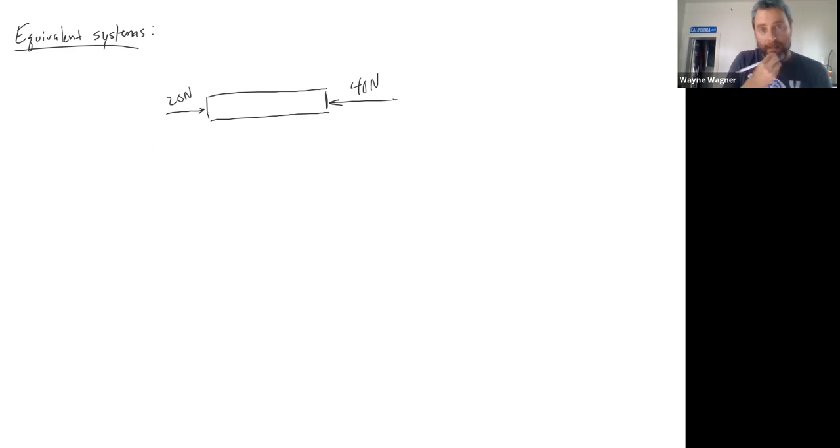Okay. All right. So equivalent systems. So basically what we're going to do is take one system, and I don't even have a good example of one, but let's just imagine I have a system that looks like this. I'll give you a really rough example here. Suppose I've got a bar, and I've got 40 newtons on this side, and I've got 20 newtons on this side. What I'm saying is, I want to replace it with something that's easier for me to think about, which is the exact same bar, but now it's only got a 20 newton right here. And hopefully you can see that these are equivalent.

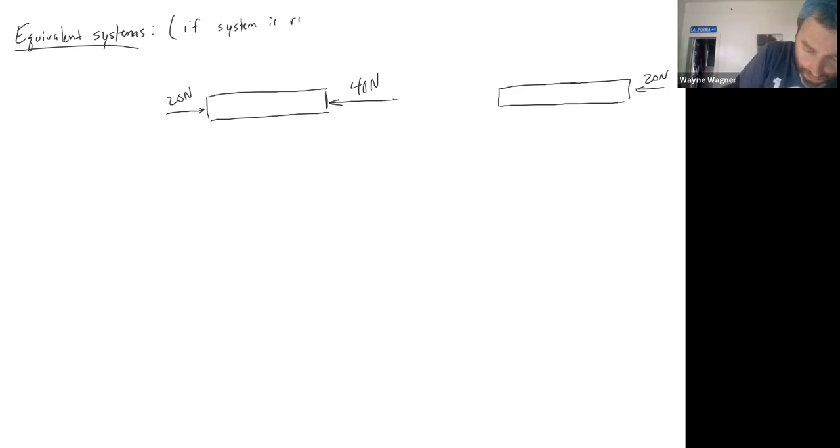Okay, they're not entirely equivalent. They're only equivalent if the system is rigid. So hopefully when you look at these two, you can see that in both of these cases, the net force is 20 to the left. But the only difference between these two is that this one's getting squeezed, right? And because it's getting squeezed, if it's not rigid, then clearly there's a difference between this one and this one, because this one will actually shrink and be a little bit smaller because it'll be compressed under that squeezing force.

Okay, so that's the way that these two are not equal, right? But in general, if rigid, then they are exactly the same. Okay, so what we're going to basically try to do in these cases is we're going to try to create a new system that is equivalent.

And the goal of this, and I've thought about this a lot because I've never really thought about equivalent systems moving through my engineering education or whatever, like I don't really think about equivalences. I'd forgotten that this was a part of this course. And what I realized is that we create equivalent systems all the time. It's not necessarily the whole system.

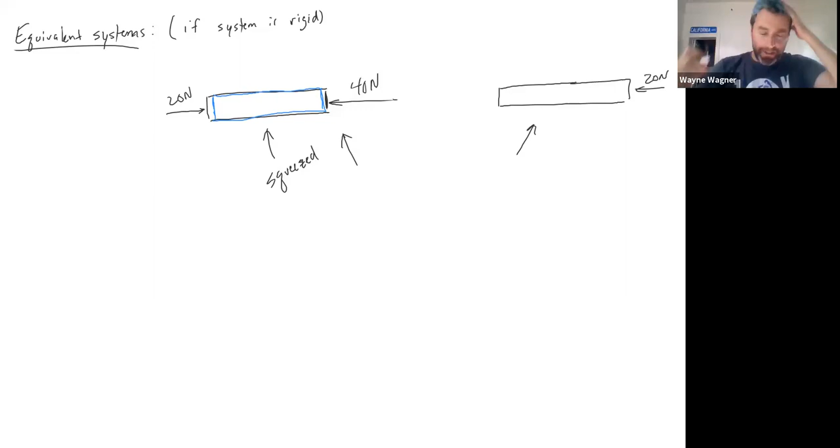Usually there's parts of the system where we're like, you know what, this is complicated over there. I'm going to simplify it by doing these things, and these things are going to make my life a little bit easier. And so you just kind of start using this all the time in little small ways. So what we're going to do is basically match between the systems.

You're going to match the sum of the forces and the sum of the moments between the original and the equivalent. Okay. And there's two things that they will ask you to do here. I say they because these are the book problems. And it's not just this book, it's like all of the books. So there's basically two possibilities.

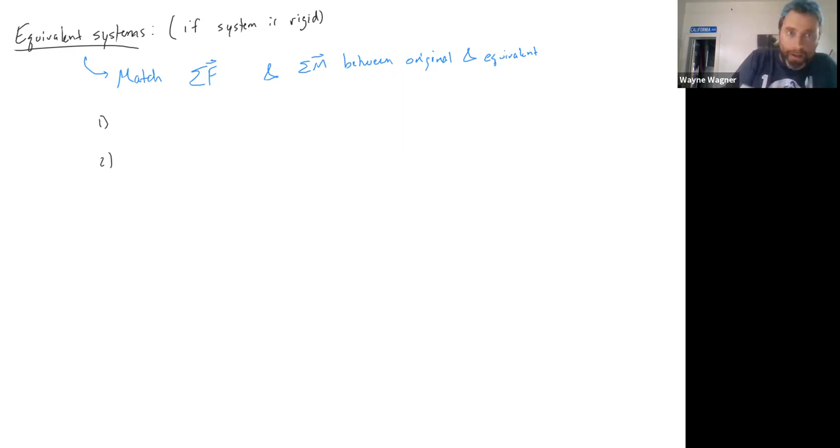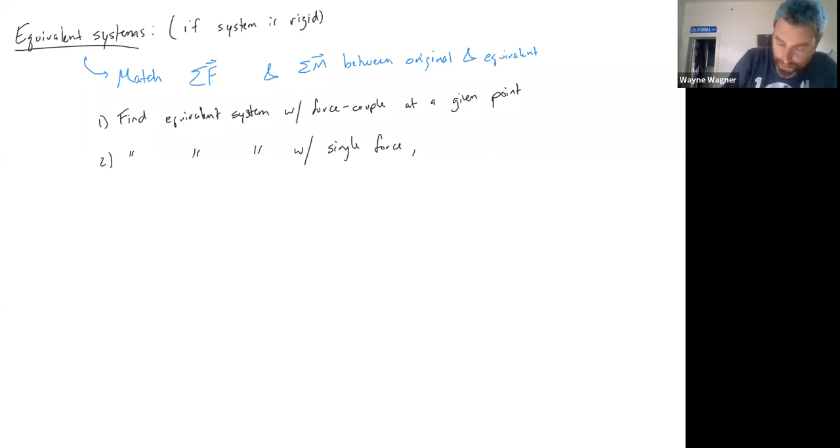One, you will be able to find an equivalent system with a single force couple at a given point. And then really it's just an extra step. You'll have to find an equivalent system with a single force, and then you need to find the location. And that's a little bit harder.

And basically, if you're asked this second one, usually what you're going to do is the first one, and then you're going to go from there to the second one. And I'll demonstrate that on some examples.

All right. So there's basically, I don't want to say rules, but I'm going to do this through examples. This thing's so annoying. I'm going to erase all of this. So I'm going to do this through examples and not through a lot of wordiness and talking. But basically, it works like this.

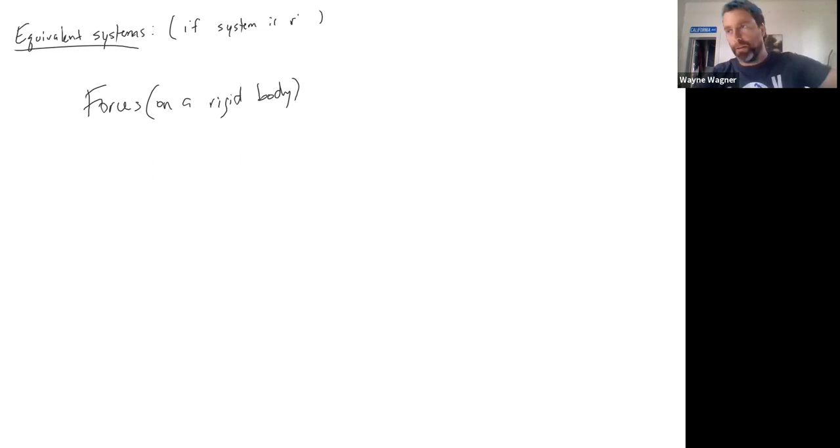What I'm going to say here real quick is this: forces on a rigid body. I'm trying to remind myself to say on a rigid body. This course assumes rigidity of the bodies, so you could put that at the beginning of the whole course. But I just want to make sure that years from now, when you're trying to remember how to do something, you remember that everything here applies on a rigid body.

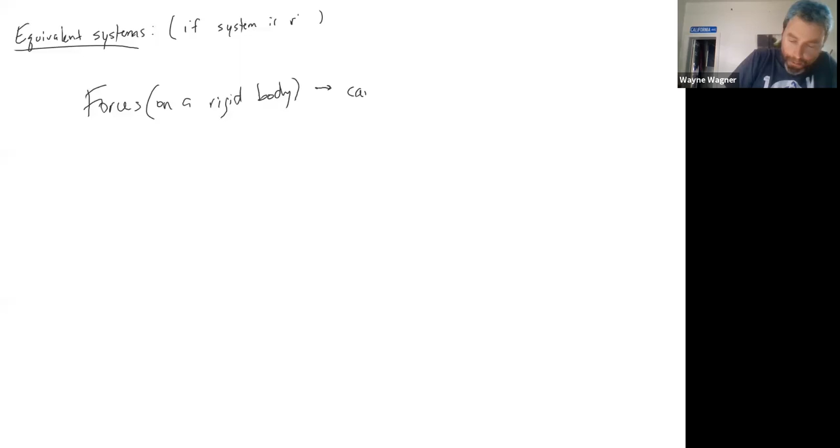Forces on a rigid body can always move along their line of action with no change to the system. That's key. The second thing here is that you can move them off the line of action, but that will affect the moment. I guess I'll just say that will affect rotation. And so you'll have to account for that.

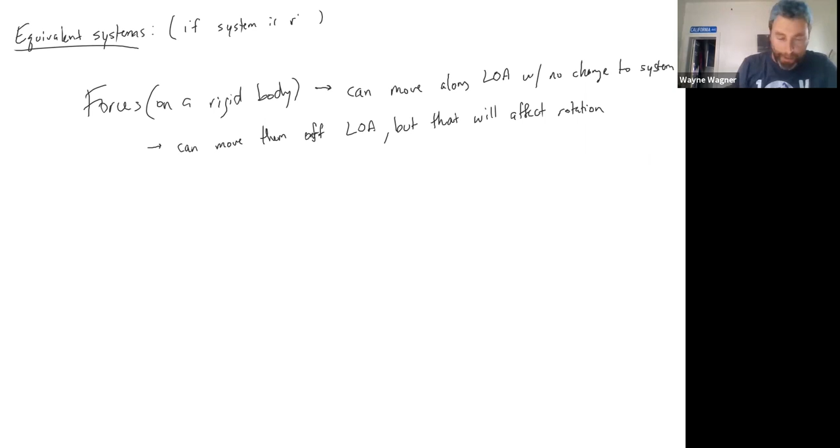So just to give a real quick example before I really get into this, let's imagine we had a beam, right? And I've got a force up and a force down, and let's say they're equal and opposite. Let's say this is 500 kips and this is 500 kips, and we've got a distance here of, I don't know, 20 feet. I'm just making this all up on the spot.

It should be noted that I can move that 500 on the top to the 500 on the bottom, and this is an equivalent system, right? I moved it along its line of action. So there was a dotted line here; that was the line of action of the force. And hopefully you've seen me do this enough that you internalize that you can do that.

And so that's an equivalent system without changing anything else. The other thing I could do is I could say, well, the 500 up and the 500 down, they cancel each other out, right? So I could be like, oh, well, I'm going to draw an equivalent system right here, and those two are going to cancel each other out.

Okay, but hopefully what you can see is that if those two cancel each other out, this is not an equivalent system. This right here is not equivalent to this over here. And the reason for that is because this thing wants to spin. So forget the word cancel out. If I took this 500 kip force and just brought it over here, so I've got 500 up and 500 down in the same location, well, that's great, now they're both gone, but I've moved this force off its line of action. And by doing so, in this case, I removed a rotation, right?

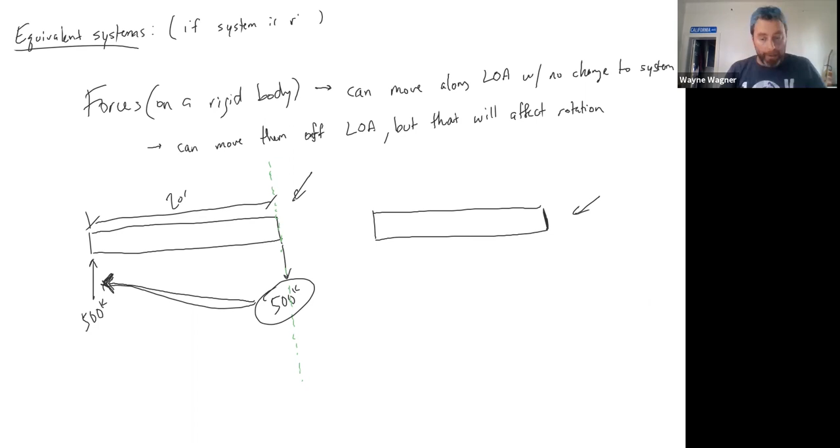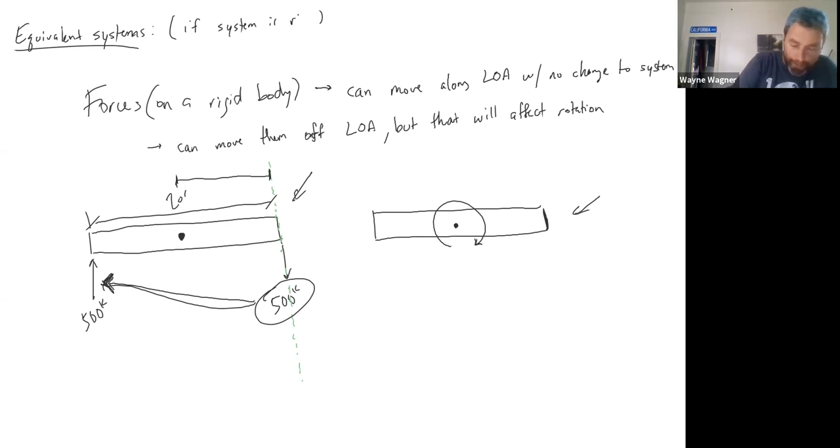So basically this thing wants to spin like this, and that is a moment. And these two forces, this 500 kip and that 500 kip, have a moment. If you remember correctly, I can go right here in the middle and try to get the moments for each of these forces. So I'm gonna put this moment right in here. For this force, the perpendicular distance is 10 feet, so this is gonna be 500 kips times 10 feet.

And that's spinning clockwise, so that's a negative. And then we'll do the same thing with this one, 500 times 10. And so all told, we get 10,000. So this thing becomes 10,000 foot kips, and that would be the equivalent. This system right here would be equivalent to this system right here.

This is all very informal. I'm about to do this a little bit more formally in a second, and hopefully it won't be so muddled. Any questions on that before I do something a little bit more formal with a real example? Nope. Okay.

All right, so let's do a real example. Clear all drawings. Okay, good. So here's a real example. Where did I get this one? Oh, this one came from your textbook. I wish I remembered what number it was. I might even have assigned this one for homework, but it looks like this. I'm going to take a split second and give you a drawing, using my trusty dusty straight edge.

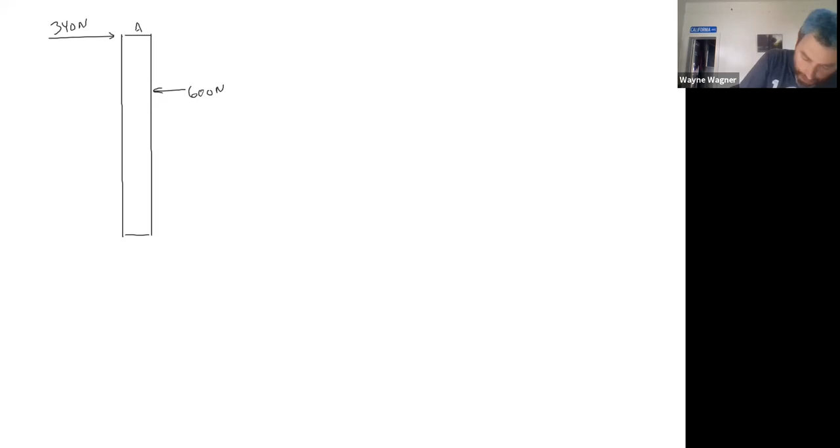Okay, so we've got a force right here. Of course, if you were doing this in your textbook, it's going to give you a different value for that force. I'm just going to give you 340 newtons. I'm just going to use the numbers on this particular problem, and I'm going to add one thing to it, 400 newtons. And then down here, this particular thing is bolted onto some kind of plate or something.

All right, we need some distances here. This is going to be 150 millimeters. This is also going to be 150 millimeters. Let's make it 200 millimeters. I like it when my distances change a little bit so that you can follow the numbers if you need to. Let's make this one also 150 millimeters. Let's make it 160, so we can follow it.

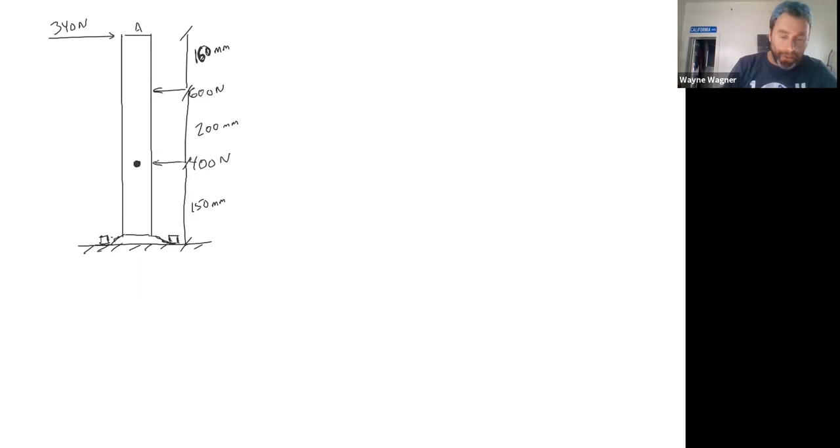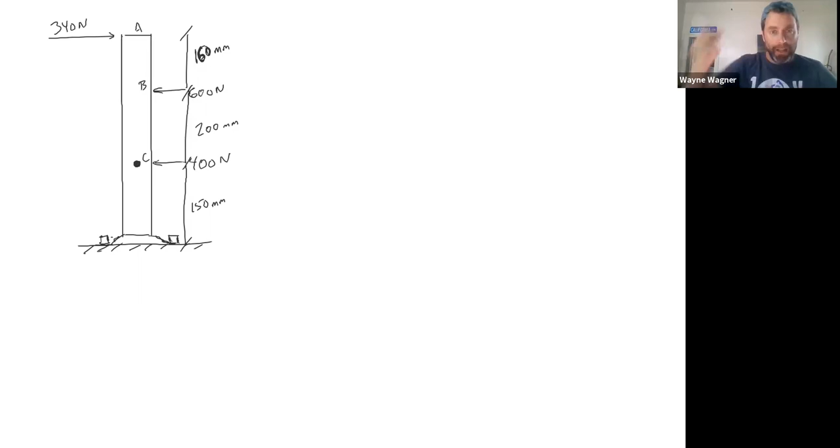The last thing to do here, because I feel like maybe it confuses people, we're going to apply a moment right here at that dot at C. So this is going to be B, this is going to be C. I'm going to apply a moment. You can imagine at C, if I just took a screwdriver, put it in at C and twisted it, right? So here we go. And let's just say that that's 6 newton meters.

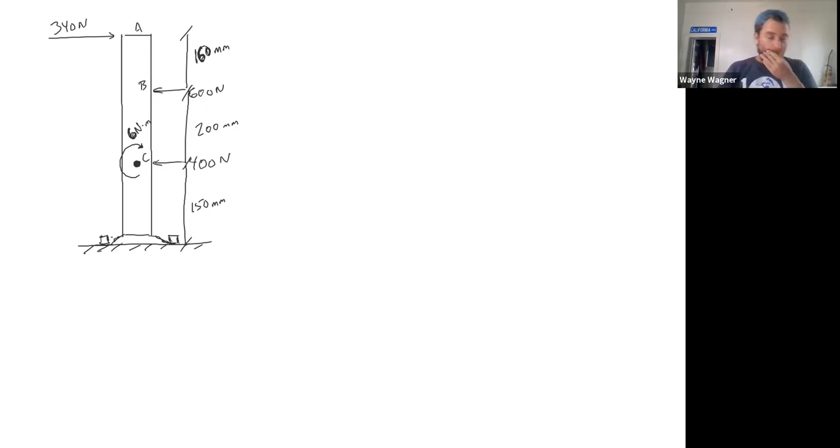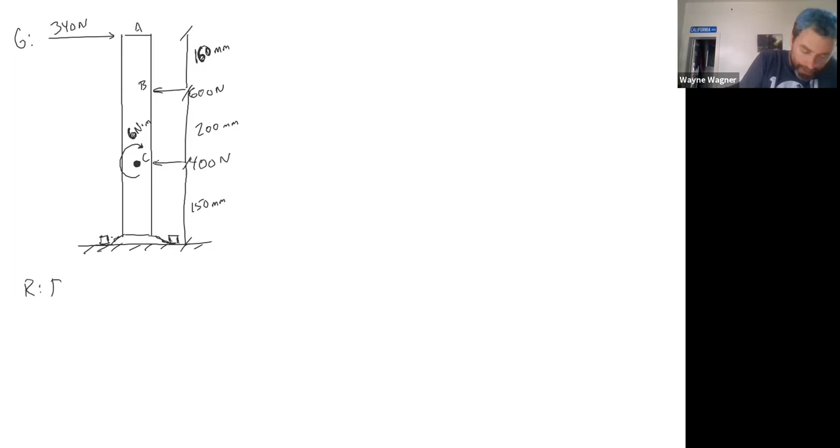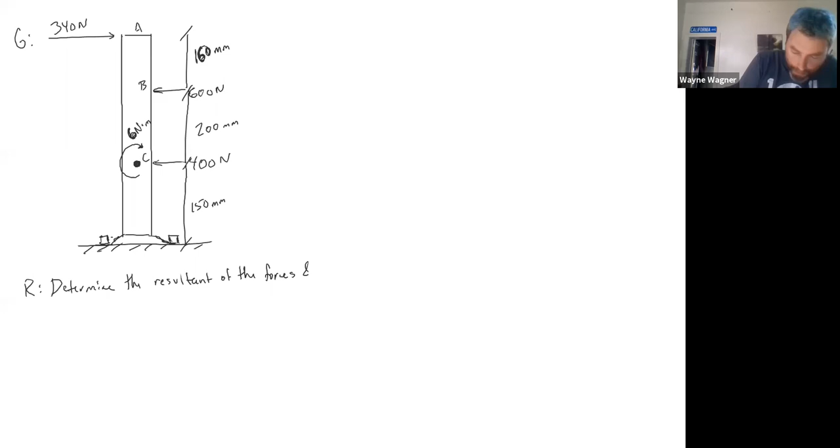So this is a little bit more complicated than the one the book gives you, because the next problem does not have an applied moment, so this is a good one to have it. What we're going to do here is create a few systems. So this is what's required: determine the resultant, this is the language the book uses, of the forces and moment, because there's a single moment there, and the distance from the ground to its line of action.

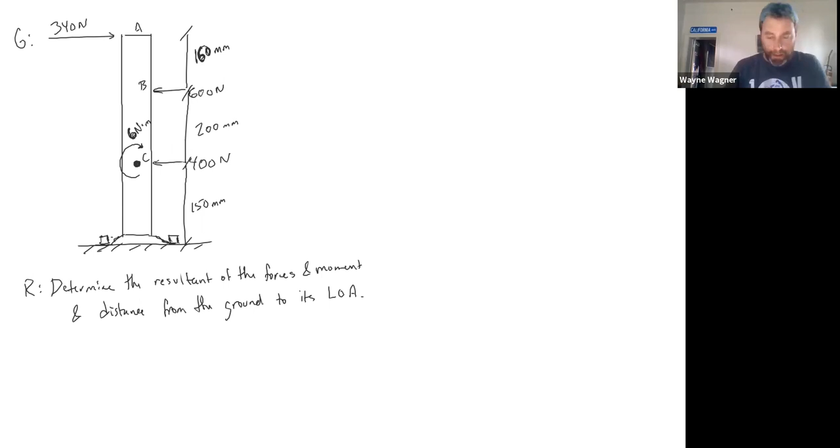Okay, so that's the language that they'll use, or at least that's the language they use on this particular problem. All right, so what this is telling me really is I'm going to replace all of those forces and the moment, and I'm going to have an equivalent system. Usually I don't like to belabor the drawing of the equivalent system, but it's going to look exactly the same.

But it's going to have a single force. I don't know if the force is going to be positive or negative, but it's going to have a single force. Let's just call it F. And it's going to be at a certain location, which we could call Y, or whatever it might be. Let's just call it lowercase b. So that's kind of what we're looking for.

It seems like I probably got the right force here. I'm a little bit worried about adding that moment in because that wasn't in the problem, but I guess we'll see what happens. So what we're going to do here is create an intermediate step. There's two things they're going to ask you for: one is an equivalent force couple at a given location, and then they can go from there and ask for a single force and for you to tell them the location.

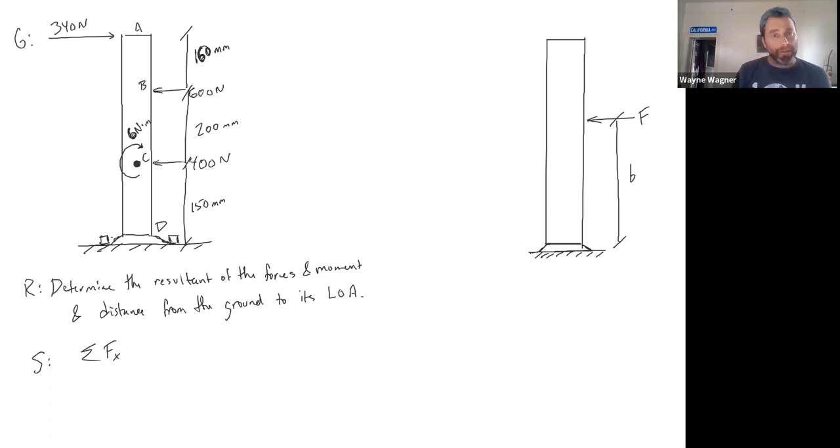So here's the solution. I want to look at this initial problem and look for the sum of the forces in the X. I'm not going to set that equal to 0. I'm just going to expand that because I want to know what the sum of these forces is, because that's the equivalent effect that I need to have on any other system. So I'm going to just add those forces up. It does not equal 0. It might end up being equal to 0, but it doesn't equal 0, so just be careful there.

The sum of the forces in the X. We're just looking for the net effect of all these forces. That's 340 newtons to the right, minus 600 newtons to the left, minus 400 newtons to the left. So the sum of the forces in the X equals 340 minus 600 minus 400. I could do that in my head, but anyway, negative 660 newtons.

Oh, by the way, I feel bad. I was a little rude to the two of you who asked about what was on the test. When this is over, if anybody is unclear, let's talk about that, so just hang out. I won't be rude. I apologize. I get testy sometimes. I try not to, so my apologies.

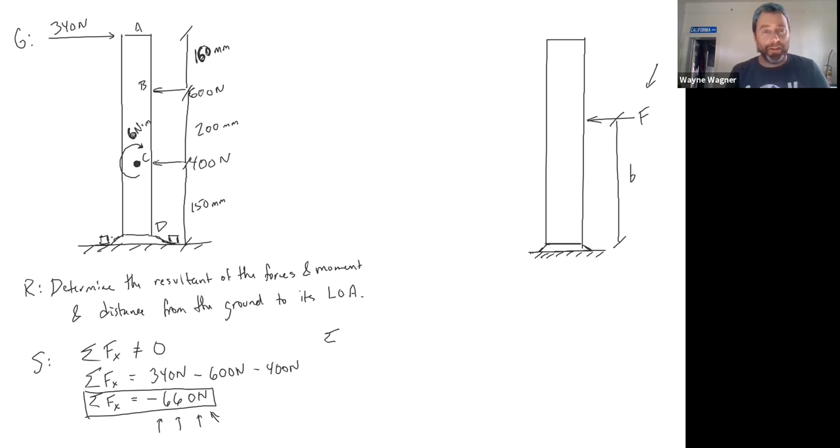So then we'll do sum of forces in Y. There are no forces in Y, so we're not going to worry about that. I chose this problem specifically because I didn't want to deal with forces in Y. The next thing I want to do is the sum of the moments, because whatever equivalent system I have, the sum of the forces in the X direction is going to be negative 660 newtons. I already know the force is going to be 660 newtons to the left, but that's kind of jumping the gun. So I want to do the sum of the moments.

And I need to pick a point that I want to do the moments around. And one of the things we haven't really talked about is these moments right here. I guess I should have put this in the official notes. This moment right here, an applied moment, can be moved anywhere with no questions asked. You can apply that 6 newton-meters anywhere you want on this thing. It has the same effect.

Now I know that that's going to be a little counterintuitive. I have a little video where a guy demonstrates that, and I'd like to show you guys that today. We'll do that in a second, but we can just move that wherever we want. Considering that my ultimate question asks for a distance from the ground, from this point down here, I'm going to do the sum of the moments around this point D.

And again, I almost wrote equals 0; it does not equal 0. It equals whatever it equals. Because this thing is static, we know that ultimately it will equal 0, but right now we're not accounting for the forces coming from that plate at the bottom at D, from those bolts and from being attached to the bottom. We will get there, we're just not there yet, and that's what we call the reaction forces.

But I've just chosen point D. You don't have to choose point D. You can choose whatever point you want. I like D because my distances are pretty well defined. And I know b over there, this thing we're looking for, is definitely going to be positive relative to point D. So I just chose it. You could choose whatever you want.

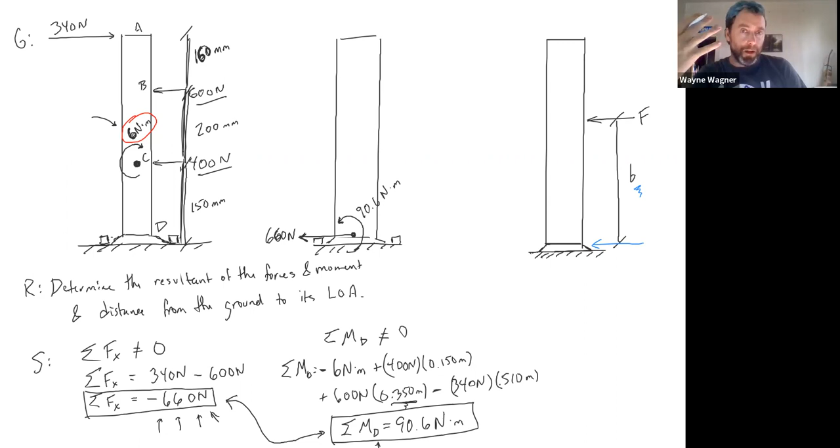Now note we could have done this at a different point, and this would have been an identical calculation. Of course, I got rid of that minus another 400. Forgot about that, or I erased it. But this one would have been different because these distances would have all been different, because instead of measuring it to D, we would have measured it to wherever you wanted the equivalent system. Does that make sense?

Okay. So the next thing we want to do is change. So this is equivalent. Is that like three equal signs? Something like that. So now I want to do an equivalence over here. Let's suppose this F, instead of being F, was 660 newtons. Let's call this system 2, and we'll call this system 3.

You can see that if b is the correct number, what I'm doing is taking that 660 and moving it not along its line of action. I'm moving it up, from down here up somewhere. And so that has an effect on the moment. This 660 imparts a moment around D. So if b is correct, I'm going to get the same moment around D as I have right here. But it depends on where I put it.

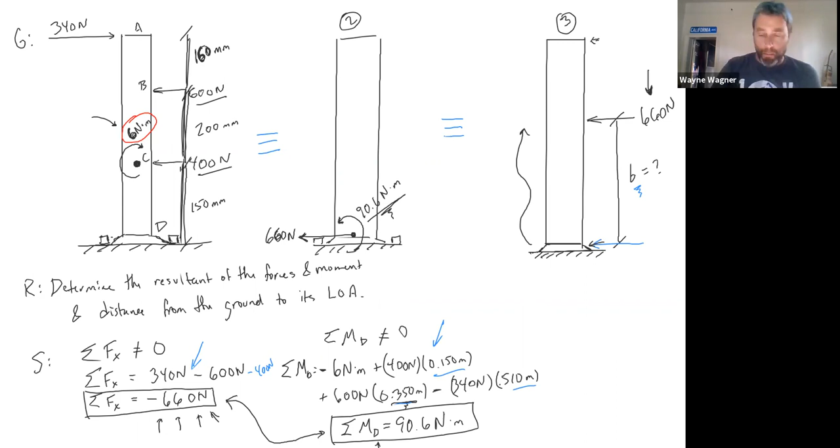If I put the 660 all the way up here at the top, then I'm going to get a massive moment, and maybe that moment is too large. If I put it down here at the bottom, then I'm not going to have a moment around D at all. So to get an equivalent system, I want to move it such that I get the same moment in these two spots.

So the way we do moments in 2D, if you remember, and usually we actually use torque for this equation, torque equals moment equals force times distance, right? And this distance, I like to put this little symbol to remind myself that it's a perpendicular distance. So I know that 90.6 newtons times meters is my moment.

And I always put my positive signs, even though mathematically we don't need to write that. But I usually do because it reminds me that I'm taking care of that sign. If I see that plus sign, maybe I'll go back and check it if I've got time on a test. But it reminds me I've already checked the sign there. And then the force is 660 newtons.

Okay. And that force is causing, it looks like it's causing a counterclockwise rotation. So the sign on this is correct, is fine. And then we'll go D perpendicular. Okay, so this distance perpendicular, in this case, that's B. That's what we're looking for. Sorry, we should change that to B. Okay, because it said, you know, the distance from the ground to its line of action.

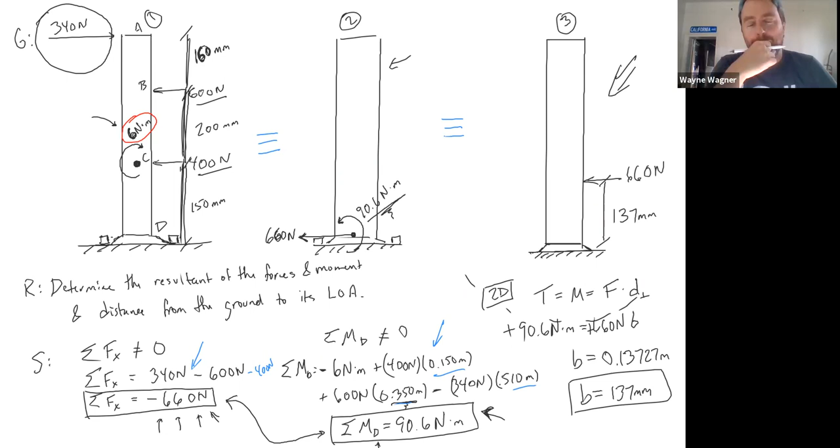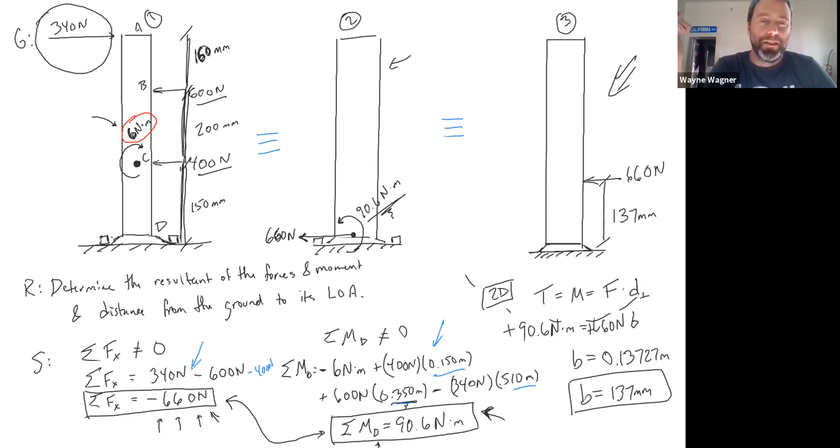We could have a resultant moment. I don't normally hear people talk about a resultant moment. The resultant is the sum of the forces. Whenever I hear moments, I think you usually call it the sum of the moments. But you could call it the resultant of the moments. Anytime you're adding vectors, you can call it a resultant. Yeah, so, but this is, so, yeah.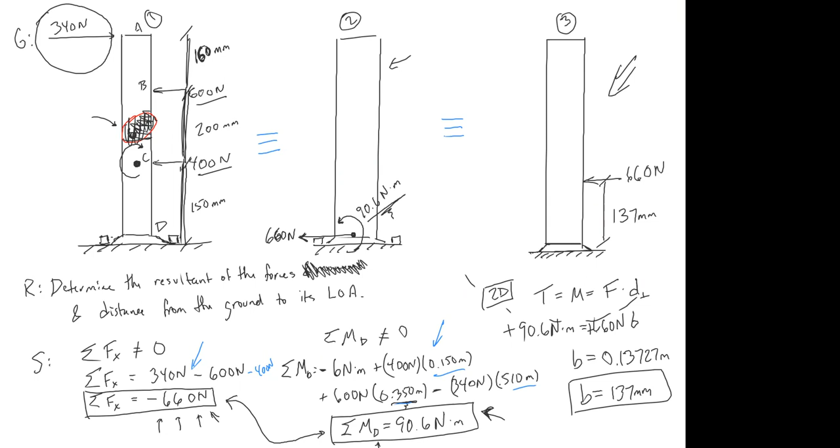Yeah, the problem is I added this moment. So this is the real way it was written: the resultant of the forces and the distance from the ground to its LOA, but it didn't have this moment right here. But I wanted to make sure that we had an example in class that had a moment, so I just added it in just now. Yeah, I was just seeing if it was like a combination of the force and the moment or just the force alone. I'm not 100% sure, to tell you the truth. Let me know if the language ever confuses you again, and we'll figure that out together. Yeah, sorry, that's not a very satisfactory answer. Resultant usually means forces.

Okay, so let's try another one. Any other questions? Good question. I apologize for my unsatisfactory answer. Any other questions? All right, let's see here. Clear all drawings. Okay, so this next one, I think I got this one off the internet somewhere. Well, I got all these off the internet somewhere. Here we go. So I didn't print these out for you, because they're 2D, and I figured I could draw the 2D ones.

Next semester, I hope to just give everybody a sheet of paper or whatever. I mean, like a handout at the beginning, like these are all the example problems I'll be doing. But probably next semester will be in person. We're all going to be required to be vaccinated, except for a few of you who have religious exemptions or medical exemptions. Okay, so there's some sort of, I don't know, post or whatever they call this thing.

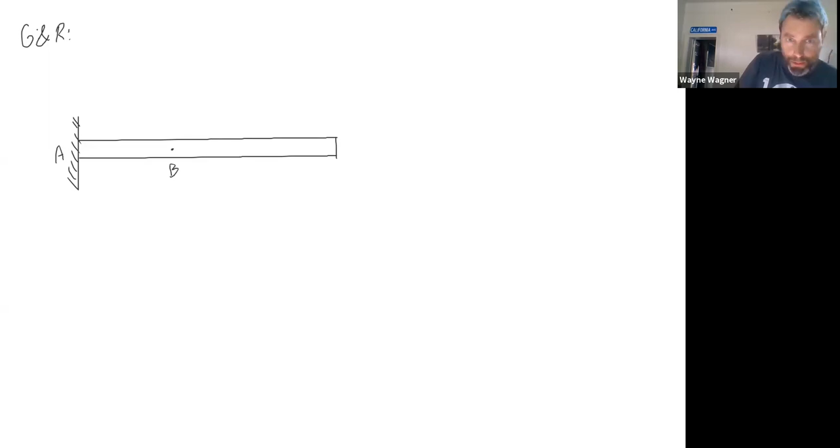Okay, given. I'm going to do given and required because I gave myself too much space here. This is going to be point A. We'll give these points A. This will be point B. So I'm going to do this in 2D. Basically, the last one was kind of like a 1D example because all the forces were in the X direction. So I'm just going to give you another one that's not like that.

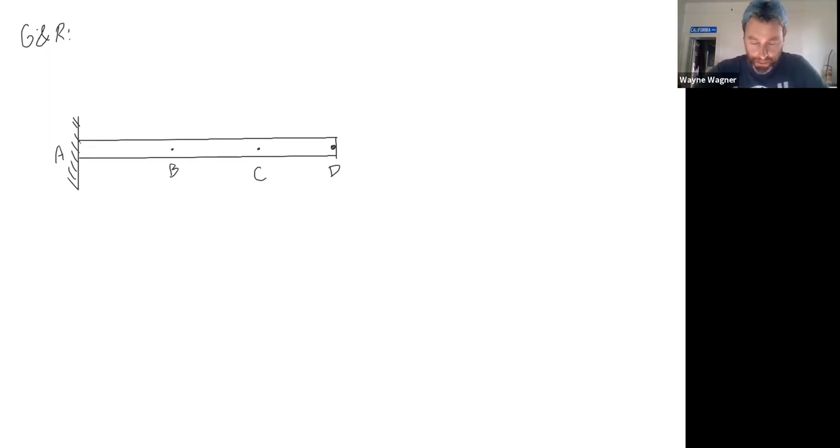And the last one we'll do will be in 3D. And I know where to find that one on the internet, so you guys can look at it if my drawing is bad. Don't think my drawings are that terrible, but it is hard to draw in 3D. So I will not be offended if you guys are like, your drawings are hard to follow. That's totally fine.

Okay, so then this is 100 pounds. Okay, and this is annoying. Or maybe it's not annoying to you. For me, I really like it when they give me a 3, 4, 5 triangle, but you can treat this like whatever. I like it when they do that. A lot of you will prefer the angle because you'll be like, well, I always just do the same thing with the angle. Okay, so it gives me distances here.

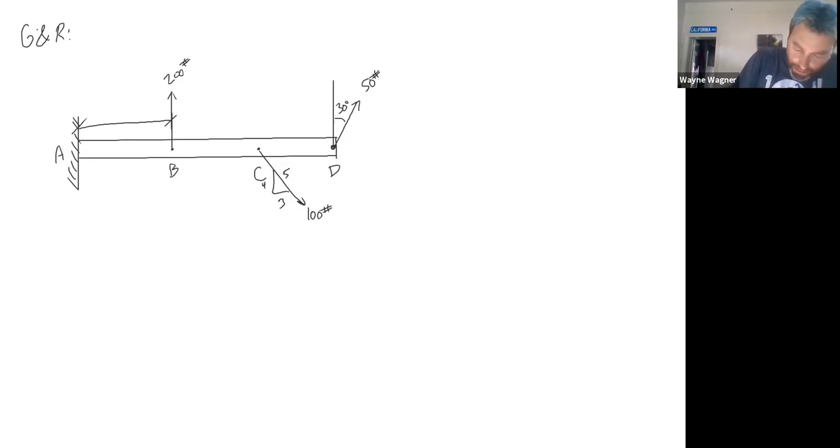Again, I'm going to change these distances. For the problem, if you were to look this problem up and find it on the internet, it gives 3 feet for each of these. I'm going to give slightly different numbers because, you know what, these are fine. We'll do 3 feet, 3 feet, and 3 feet because the distances are going to be 3, 6, and 9, right?

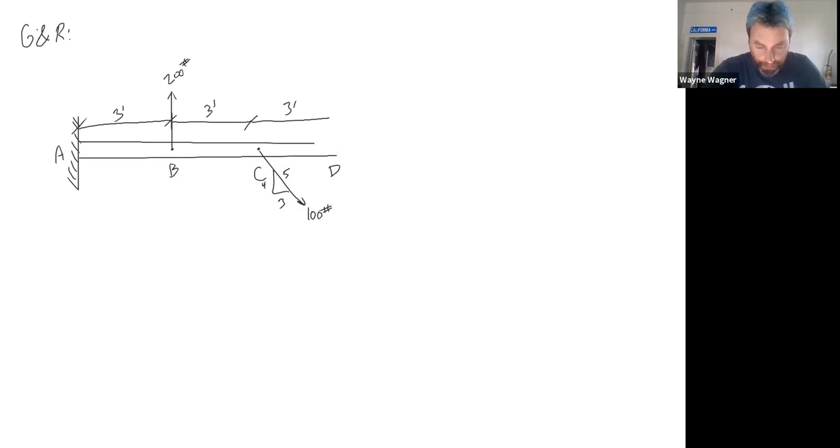Actually, you know what? This really isn't all that different. Let's change this. I'm going to change this problem a little bit. Should have thought of this. I thought I had a nice 2D example, but it turns out that that's really a 1D example. Okay, so then let's have this thing go in a little bend here. Okay, same force, same angle.

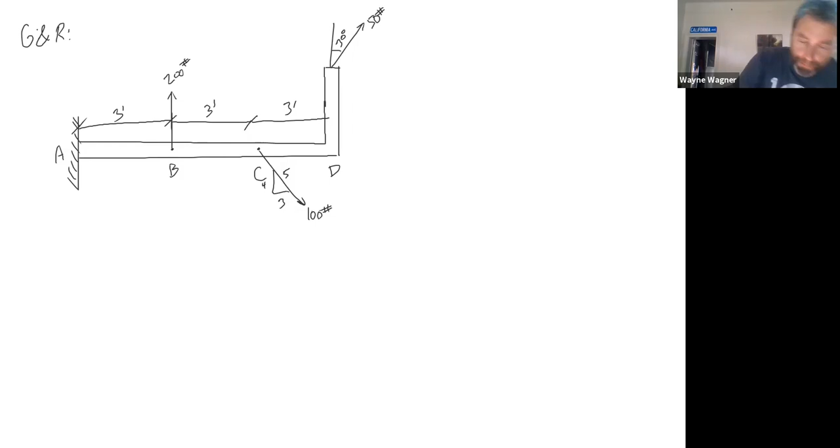Okay, 50 pounds. This is also practice with moments, right? Because you guys haven't done that, or maybe some of you have done that homework already. So then this is going to be 3 feet. We're just going to keep everything at, let's make that 4 feet, so you'll know when we've gone in another direction. Okay, find the equivalent result.

So here we go. Find equivalent resultant force and couple acting at A. So that's the first type. And then the equivalent single force.

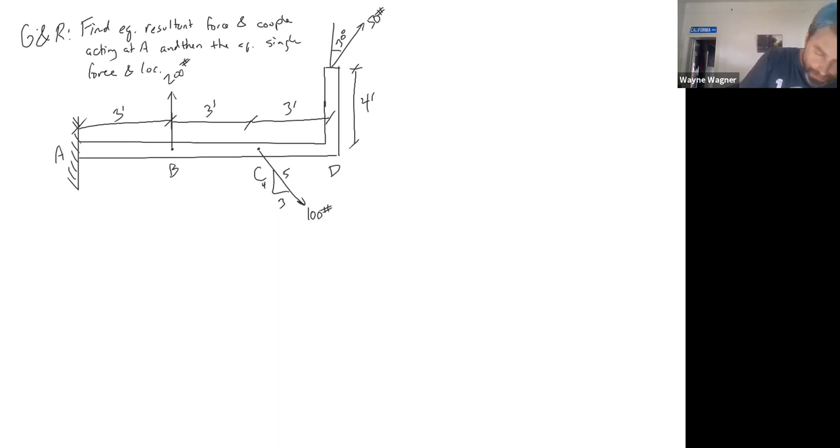Location measured from A. I really doomed myself here. What was this, 200 pounds, 200 pounds. Measured from A. Look, in this case, we're not going to say measured from A. I'm going to say on AD.

All right, so we're going to do exactly what we just did, but it's just going to be a little bit different, right? So now we've got 2D, so I've got to do some forces in the X, some forces in the Y, and then I've got to do moments. And this time we've got two questions. We want the force and couple acting at A, so they give us the location, and then we get the equivalent single force, and they tell us it's going to be along AD.

If they don't tell you it's going to be along AD, it can be annoying. I don't think they're ever going to do that, but they could. So the first thing I'm going to do, just because it's going to make my life a lot easier, is get the components of these forces. I don't think the green shows up very well, so I'm going to do blue. So this force is not in the XY. It's on an angle. So I want to get its components.

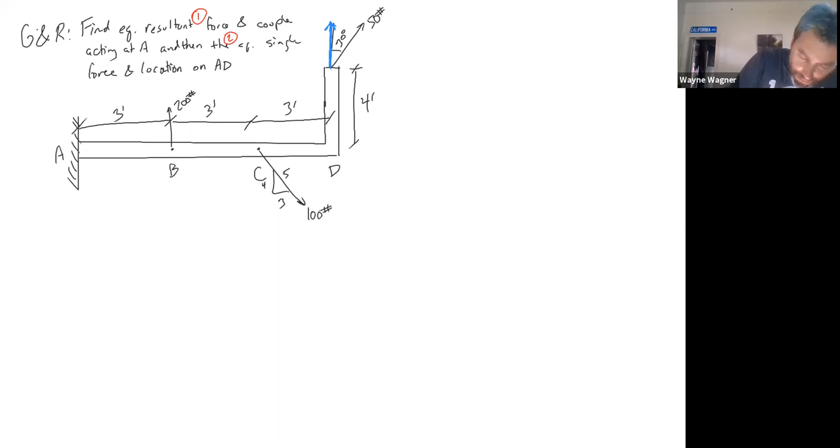I'm not going to do the trig here. If you want to stay after, we can talk about the trig and do that. But it's going to be 50 sine of 30. At this point, I'm hoping you guys are getting this. So 50 sine of 30 is this side. So that's going to be 25 pounds. And the other side is going to be 50 cosine 30.

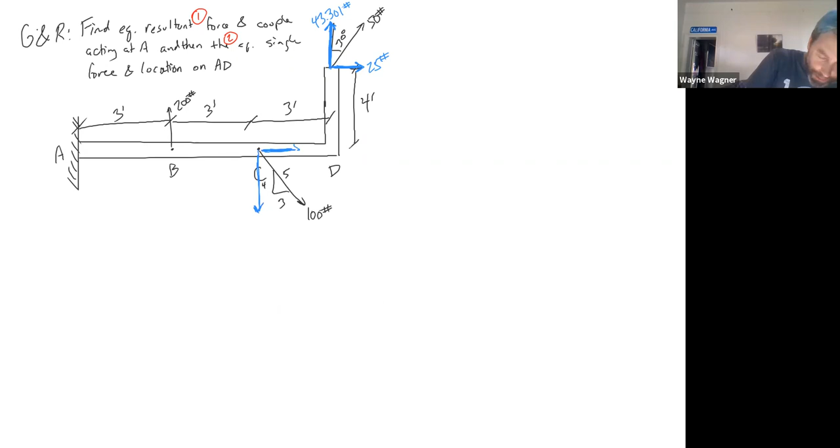That's 43.301. 43.301 pounds. Okay. Now for this one right here, we're going to do the same thing. And sometimes it's just easy to just knock this out early, right? You know you're going to need this, so just do it.

In this case, what I'm going to do is a similar triangle. So I'm going to note we've got 100 pounds along the diagonal. So if I divide by 5, that's 20. And then if I multiply times 4 in the vertical, I'm going to get 80 pounds here. So again, I'm going to take that 100, divide by 5 and get 20 and multiply times 3, and I'm going to get 60 pounds here.

Okay, a lot of you will prefer to go and get the angle and then do the trigonometric functions. I always prefer to use the 3, 4, 5 if I can. Notice this is its own triangle. So here's the 3, 4, 5. Notice this is a similar triangle. Now this is 100, 80, 60. Much easier to just do similar triangles than to do sines and cosines.

Okay, so anyway. All right, so now what we're going to do is an equivalent system. They gave us a point, so we're going to do this around A. So remember, for the forces, it doesn't matter. We're just going to add them up. The location doesn't matter for the forces. So sum of the forces in the X. Again, I want to write equals 0 because we're already getting used to that. That's not the case here.

So the sum of the forces equals, I'm just going to expand in the X direction. I've got this 60 pound to the right, so it's a positive 60. And then I've got 25 pounds to the right. Okay, so that's not too bad, 85 pounds.

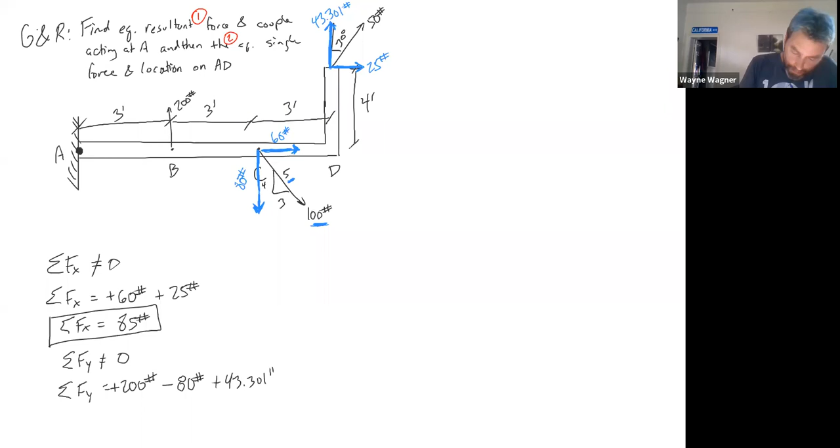We've got 200 up. That's positive. We've got 80 down. And we've got 43.301 up. So the sum of the forces in the Y equals whatever that is. So 200 minus 80 is 120, plus 43.301. I don't know why I'm getting out a calculator for this. So it should be 163.30 pounds. Keeping 5 sig figs all the way to the end. Questions on the forces before I move on?

Okay, so let's do the moments. As always, the moments, in this case, it's the Z direction. If this is X and this is Y, then Z is coming out the board at us, because remember, X is the fingers, Y is the palm, which means the thumb is the Z direction. So the Z is upwards. And my fingers are curling this way around that point, and that is going to be the positive. So a lot of times people will draw this to remind themselves of that. So this is the Z direction, and we're going to take it at A.

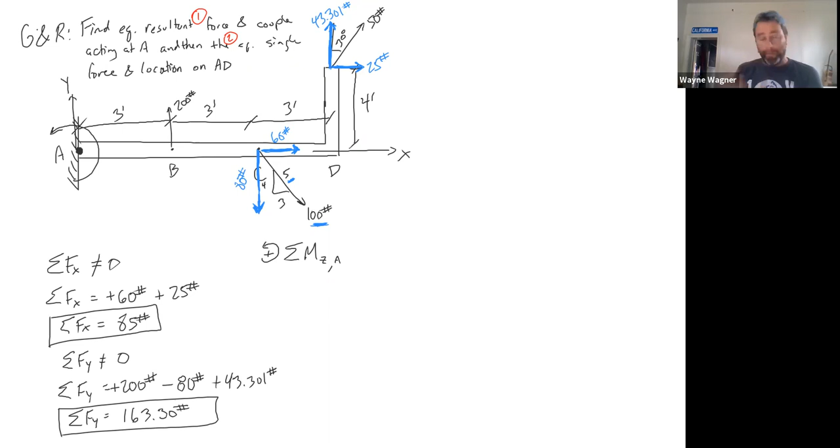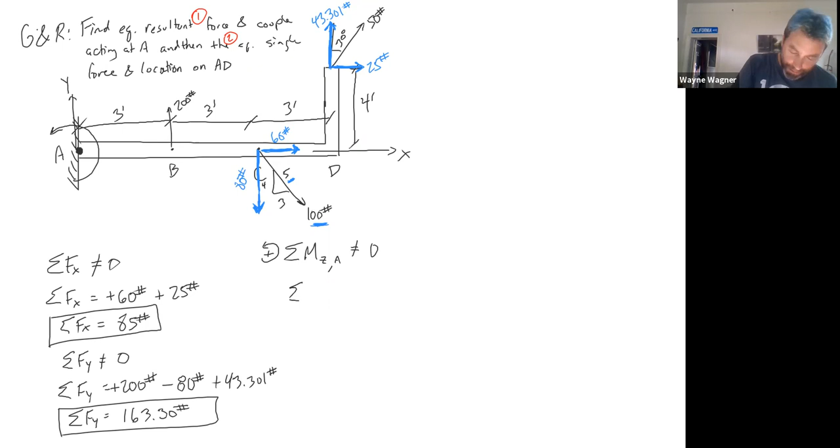Most people won't bother saying this is the Z direction. They're just going to say they're taking it at A. I like to remember that it's really going around an axis. Anyway, so again, it does not equal 0. It equals something else. A lot of people will get into the habit of doing that. It's not really a bad habit. I've never really been in that habit, so I'm going to forget. But it's not a bad habit to get into, to remind yourself, counterclockwise positive.

All right, so remember, we have to think about all of these forces, and I'm going to mark them in red as we deal with them. So here's the 200. We've got 200 pounds, and that looks like it's going to go counterclockwise, so that's a positive. And its moment arm: remember, the moment arm is perpendicular to the line of action, so that's going to be 3 feet.

Then let's do this 80. It's going in the opposite direction, but it's got a larger moment arm. So that's going to cause things to spin clockwise. Can you all see which way these things are spinning? Hopefully you can. Please speak up if you can't. So it's 80 pounds. Because I'm more than happy to show you. Relative to A, it's causing things to go this way, right? So if I were to draw a big circle, that's clockwise, so that'll be negative 80 pounds. And then the perpendicular distance there is 6 feet.

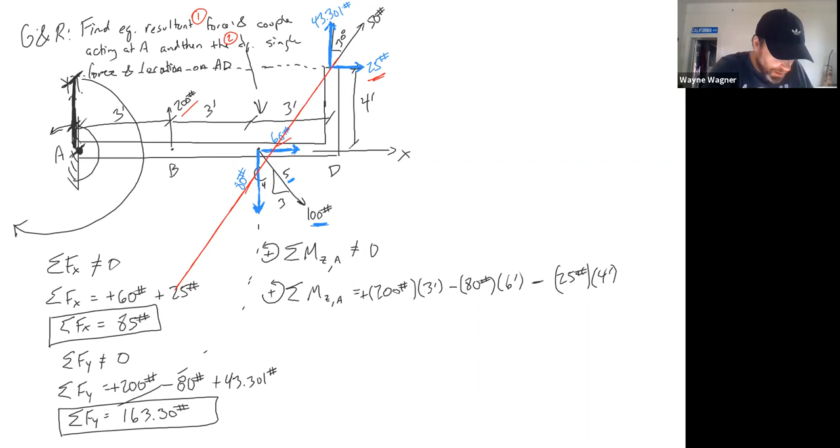The problem with doing the 50 is if I did the 50 by itself, I would need to get a perpendicular distance for that force, right? So I'd have to draw a line like this, and then get the perpendicular. So the perpendicular distance is somewhere like right here, and I don't want to do that geometry, right? So what I'm going to do instead with that force is split it into X and Y, because it's relatively easy to get Y distances for my X force and X distances for my Y force. Does that make sense? Yeah, that makes sense. Okay.

Right. So then we'll go up and now we'll do the 43. Now we'll do this one. It looks like I'm going to have to go on to the next line because I've used my space poorly. And again, I'm going to move it along its line of action until it's at point D. So we'll get 43.301 pounds. Its distance looks like it's 9 feet. And it looks like it's causing things to go counterclockwise. So that's going to be a positive.

Okay, so we add all these up. Sum of the moments around the Z axis at A equals. So then this is just a calculation thing. So what's this? This is 600. This is minus 480. So we're at 120 minus 100. So we're now at 20. And then, of course, I can't do that last one.

43.3, oh, come on. 43.301 times 9. That big number, 389.71. And we're going to add another 20 to it. So we get 409.71. Okay, and the units here are foot pounds. So we'll do foot pounds. You'll see it written sometimes. Okay, so we've already done part one of this problem.

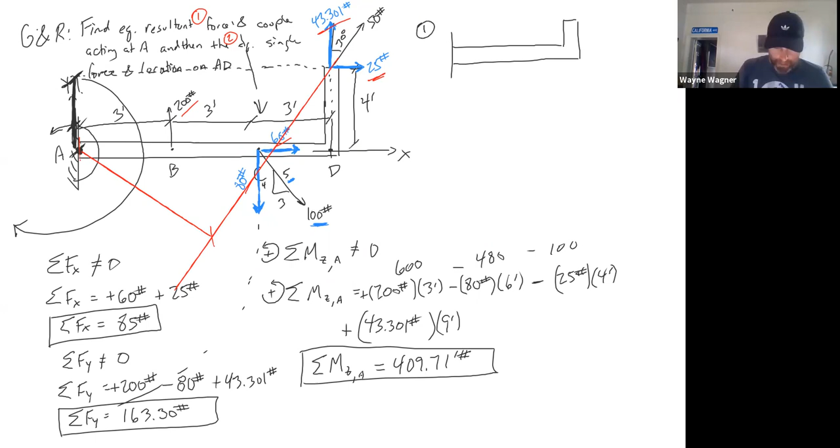So part one looks like this. I'm going to just draw it small. Okay, and let's see. So the equivalent system. This is part one. Is 100. So we got 85 in the X. Okay, 163.30 in the Y.

Pounds. Okay, and then we need a moment, a positive moment, notice. So it means this is counterclockwise. Of 409.71. Well, since we're reporting, we'll go down to 3 sig figs. So this will be 410. 410 foot-pounds. All right, so.

All right, now hopefully what you're thinking is, wait a second, that's not a single force, that's two forces. And you're right. It's actually a single force that we have in components. So we actually don't want it like that. So we're going to get rid of that. Okay. So sorry if I messed you around. We actually want a single force. So we're going to convert those two forces into a single force. So we're basically going to do Pythagorean theorem.

So 85 squared plus 163.30 squared, raise that to the half power. So the resultant of these, F, I guess we could say the sum of F. I don't want to call it sum of F. The resultant, the magnitude is 184.10 pounds.

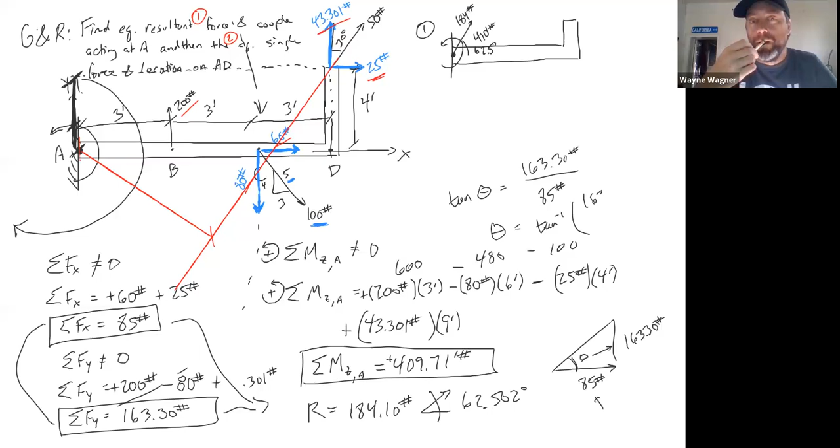So if we wanted to keep this thing from turning or moving, we would need to apply equal and opposite force and moment to keep it there. So Jerry, that's playing right into your point, right? All of those forces are wanting to twist it off. And if we want to keep it from twisting off, we're going to have to apply force at A to keep it where it is. And we're going to have to apply a moment at A to keep it where it is. Okay, does that make sense?

Okay, and then the last bit, of course, and we'll get to this later in the semester, is obviously the beam itself needs to be able to handle those kind of forces, right? And so those are called internal forces, and we'll get there. Wait.

So like the one with the force of 100 pounds, we only use the Y component for that one because it's directly in line? Is that, or how does that part work? Well, because the X component of that force is going right through the middle of A. So if you have an X component force, you need a perpendicular distance.

So imagine this is a door from above, right? So we're looking at the door and you're standing at point C and you're pulling at point C straight away from A. It's not going to cause that door to open or close. It's just going to pull on A, right? It's not necessarily going to go clockwise or counterclockwise. It's not really going to do anything, right?

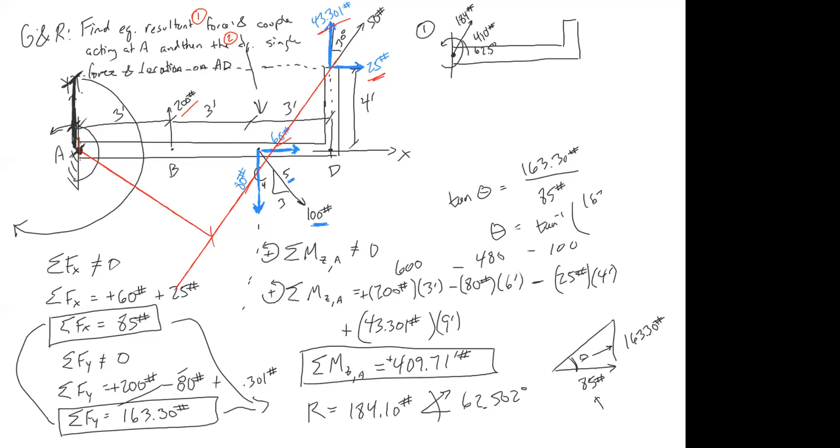You got to push up or down in order for that door to open or close, right? Does that make sense? Yeah. Okay, so that portion of that force is not doing anything. All right, I see. I was just trying to distinguish between the two.

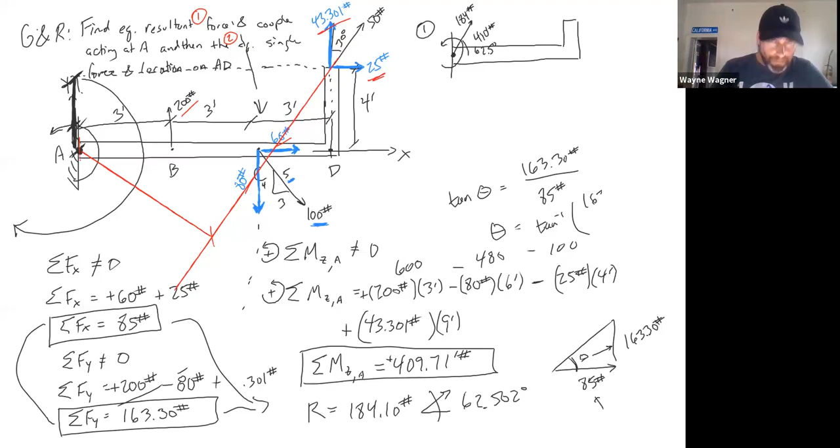Yeah, of course. Okay, so I'm copying down this answer right here before I move on to the next thing, because it's not going to let you guys see what I draw unless I clear the whole screen, which is unfortunate. That's what happens when my hand hits the wrong thing. Okay, so I'm gonna go back and I'm gonna do 3 sig figs for the final bit. I'm gonna clear all the drawings. I'm gonna unshare and then share again. Sorry, whenever I do that, it goes haywire.

Okay, so we're gonna finish this problem. And so basically we're gonna start from this. I didn't write it down, so we're gonna go to only 3 sig figs, which of course is not really the way I prefer it, but I didn't copy down all those numbers. Okay, this is 62.5 degrees, and this is 410 foot-pounds. So this was the answer to part 1.

And I want the answer to part 2, and it's going to be a single force, and I want to know where it's going to act, right? And so I already know a few things. I already know it's going to be 184 pounds. I already know it's going to act at 62.5 degrees.

And to make this even easier, I already know the components of that force. You guys are going to have to tell me what they are because I forgot. This one is 85, I believe. And then there's a vertical component, which was what, 100 and something? 163.3.

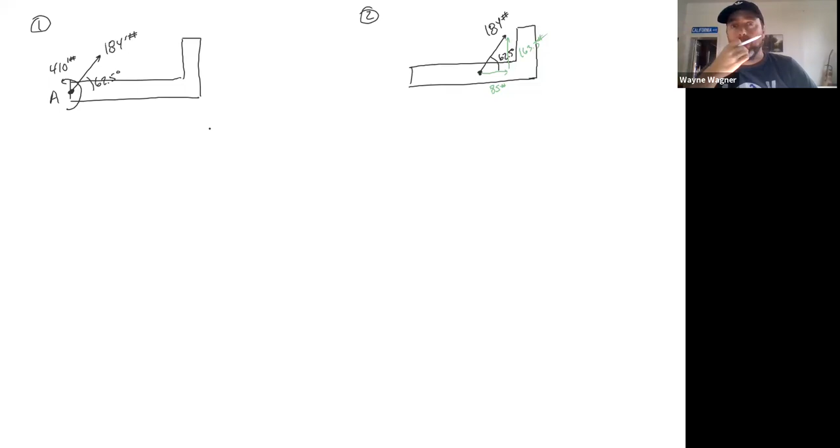And so as we move that force along to the right, we're creating a counterclockwise moment. So that moment of 410 at A would increase, or no? Okay. This 184 needs to account for both the force here and the moment here. So I want this 184 to create this 410, essentially. So would that 410 move along with that resultant?

No, hold on. So basically, these two systems are equivalent. If I think about point A over here, and we haven't found the point yet, and I solve this system right here, the force to the right is 85, the vertical force is 163.3, and the total moment around point A is 410 foot-pounds. But that moment is coming from this force, because of the lever arm.

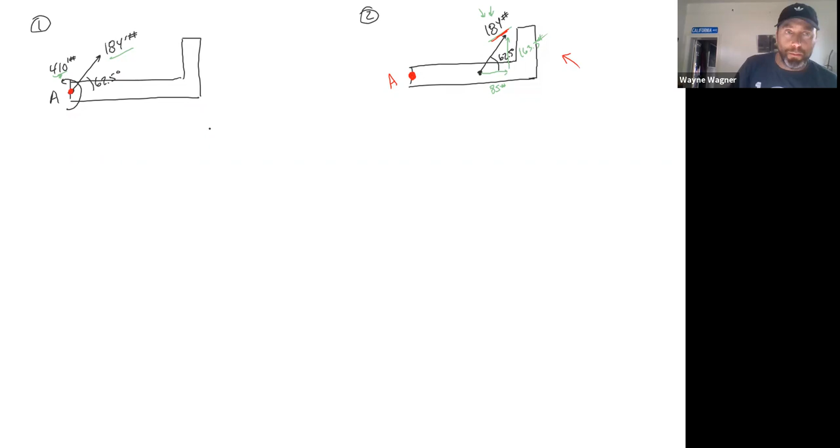Whereas if I do this system over here, that 184 pounds does not contribute to the moment. And it's got 410 foot-pounds that has to be applied. So okay, you're trying to find out where on the arm you're causing 410 foot-pounds at point A. Right, exactly. If basically I had a wrench and I was pushing it, where would I push on that arm to get 410 at the bolt, or at A, wherever it is? Right. Exactly. Okay.

Okay, so we're going to go ahead and just solve this one. This last little bit is usually very easy. Not always, but the last step is usually the simplest part. What we're going to do is ignore this 85, because its line of action goes right through A, so it's not going to cause any rotation. And we're just going to use this 163.3 right here.

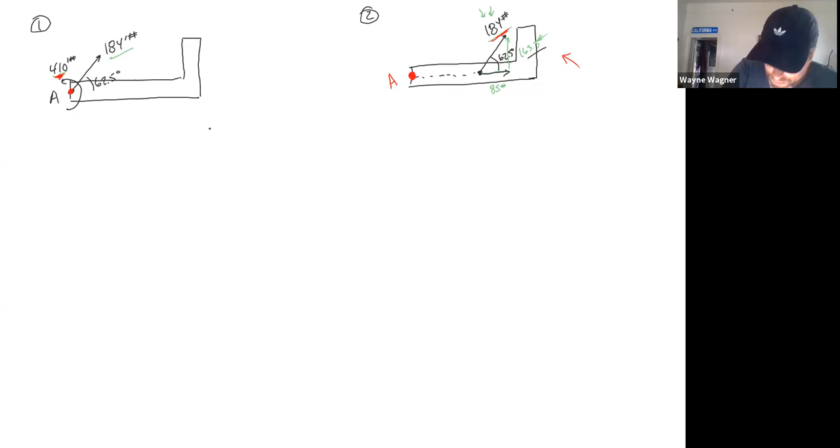And we're going to say, well, the moment at A in the Z direction equals the force times the perpendicular distance. And so the moment around Z at A, well, we know that number. It's a positive 410 foot-pounds, equals the force, which is 163.3 pounds, times D perpendicular. And then we'll just solve that equation.

Okay, calculator: 410 divided by 163.3, 2 point something. I only use 3 sig figs, so that's all I'm going to answer with. Feet. So this distance right here is 2.51 feet. And so that's your answer.

Okay, and they're involved. But I think if you just walk through it... I forgot who just had that question, I think it was Kyle. Anyway, these questions definitely got me too. I kind of stare at them and I'm like, what's going on here? Why is this? It is a little bit counterintuitive. And then all of a sudden, when the light goes on, you go, okay, this isn't so hard. I can kind of see what we're doing here. But I agree with you entirely, it's a little counterintuitive.

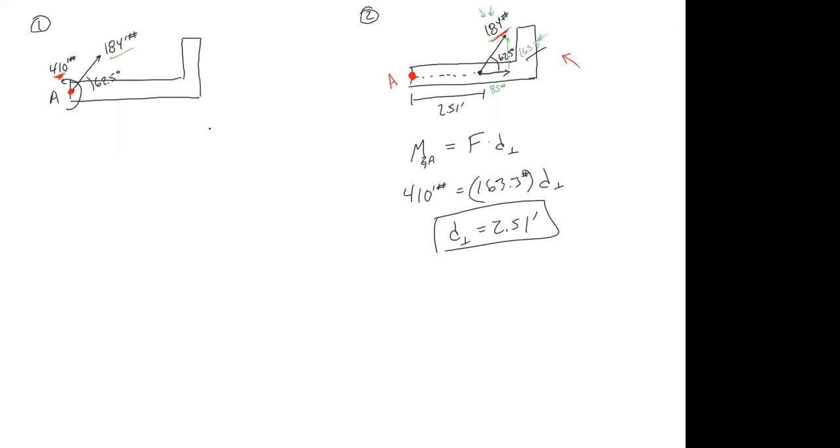One more thing, Wayne. You're using the 163 because that's the perpendicular force. Right. So if I think about each of these forces in turn, this one, the 163, has a perpendicular distance like this. And then this 85, let's use a different color. It doesn't have a perpendicular distance, right? It just keeps going right into the middle. Yep, that makes sense. Thank you.

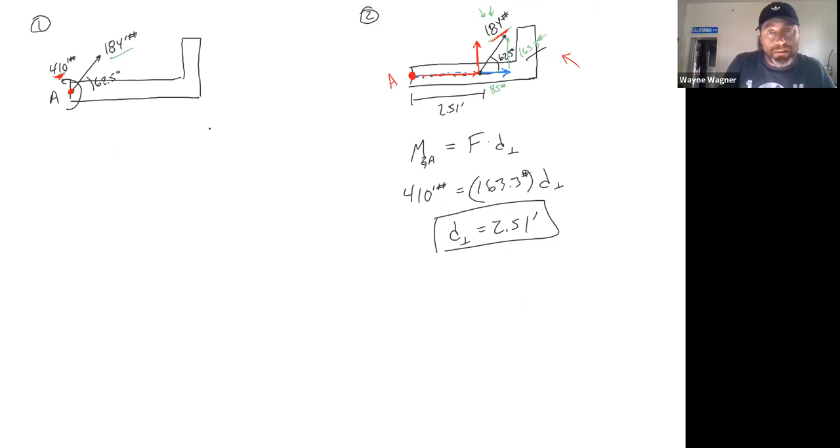Okay. All right, so I'm going to try to start this 3D one, and maybe just set it up. Let me clear all drawings because I'm not going to have a whole lot of time. Where are my notes? I should start doing the 3D ones earlier. So if you want to see what this one looks like, you can go to the practice set for moments. It's number 18, I believe. Anyway, I'm going to draw this as quickly as I can, which shouldn't take that long. So we've got, let's see here.

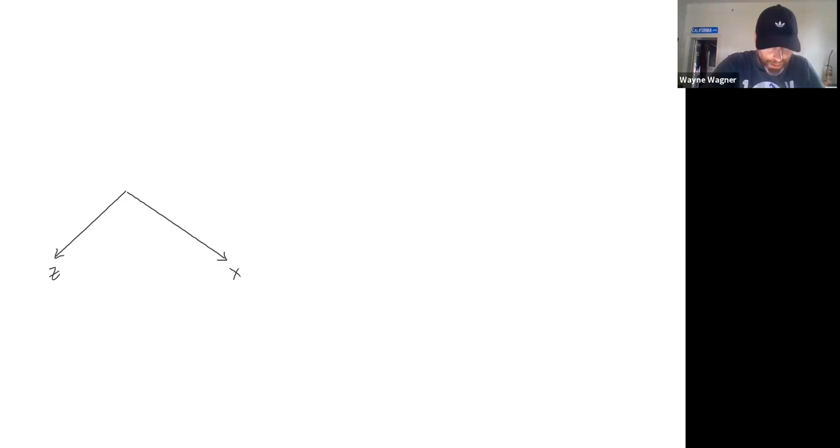Now, some of you have complained to me that you don't like the fact that X, Z and Y are not always in the same location. That was me. Oh my God, that makes me so mad. And believe me, it wasn't just you, I think I had a few people. I hate to be rude like this, but you're gonna have to get over it, because it's going to change. It's gonna be all over the place. For example, this problem even came from your textbook, and this is not the way you typically see these. So, not trying to be a jerk, but...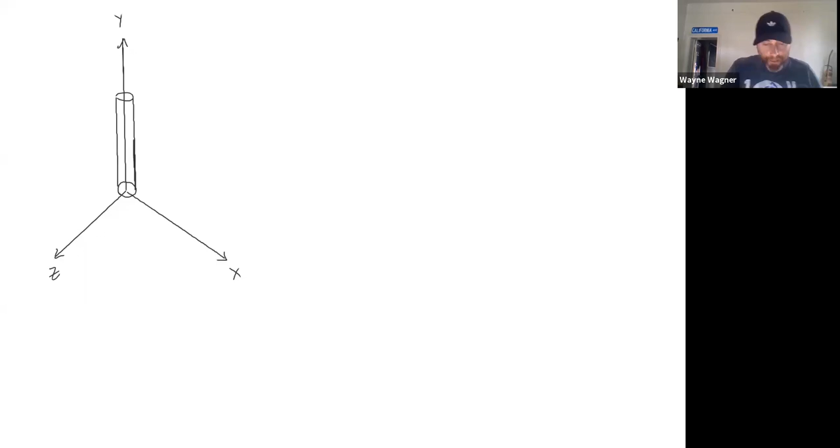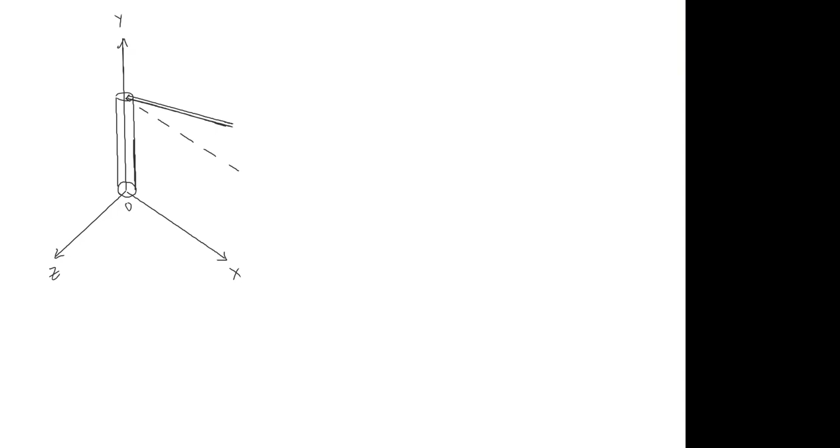All right, so we've got some kind of thing here, and this is point O. Up here there's an axis like this. And then there's a bar, kind of coming off this way. Which ones are I, J, and K in this format? I is always X, J is always Y, and K is always Z. Always. You will never see that get altered. And there's this thing, and there's kind of an angle going like this. And here's P, a force right here.

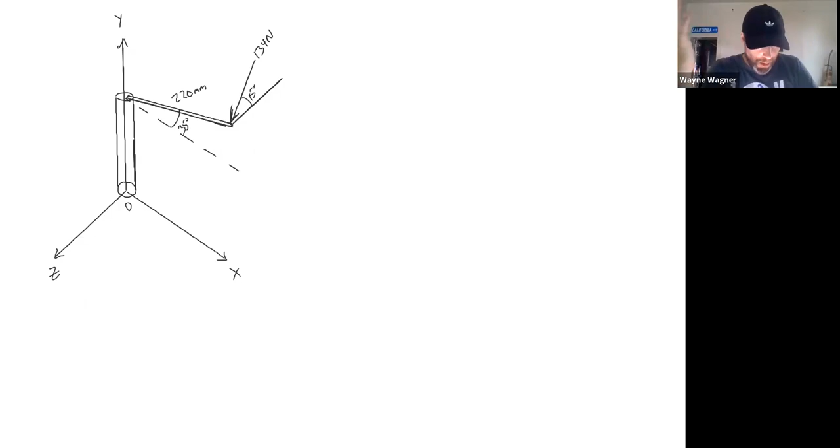Okay, and this is 15 degrees. Okay, and then they say 134 newtons right here. This thing is 220 millimeters long. Oh, we get an angle right here. 35 degrees is with respect to the Z-axis. Right, this 35 degrees is with respect to the Z-axis, or basically the XZ plane, but yeah, the Z-axis, right? Or the negative Z-axis in this case, but whatever.

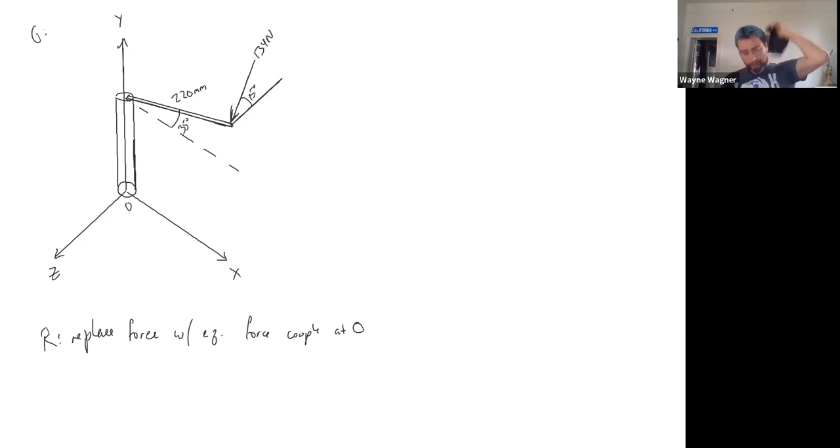Okay, so what we're going to do is replace this single force with a force couple system. So this is given and required. Replace force P, or force 134, with an equivalent force couple at O. I'm not going to even try to draw that one, but I want to show you how to do this. So the first thing we're going to do is take this force right here and get it into its components.

Okay, so that's annoying, right? So we want to put this one thing down to the Z axis. So we're going to go down like this. Boom. And then we're going to go over like this, to get those forces. The nice thing about this is it really only has two components. It does not have an X component. That won't always be the case. But this one right here will be 134 sine of 15. And this one right here will be 134 cosine of 15.

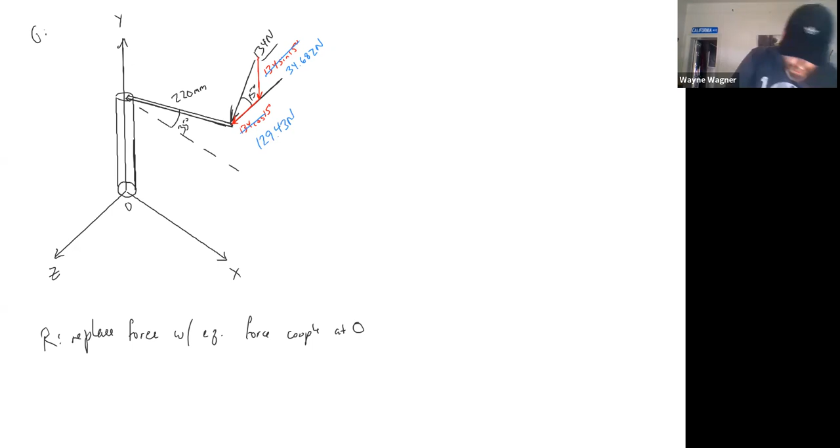Okay. Go ahead and put those in the calculator and give you some actual numbers. 134 sine of 15, that's 34.682 newtons. And this one down here is 134 cosine 15, so we get 129.43. All right. Now, luckily, we do not have to do any more trig with that because we got lucky, right? Because it happened to be parallel to the ZY plane.

Okay, so what we'll do now is solve this. At O, we're just going to sum forces in the X direction. Does not equal 0. I know I keep writing that, it's a little annoying, but we need to remember that. In the X direction, we don't have any forces, so it actually does equal 0. Then the Y direction. There's only one force in the Y direction. Y is vertical, so it's this one. So we've got a negative 34.682 newtons. Hopefully you already know what we would do if we had other forces, but in this case we don't. So this one's a positive 129.43 newtons. Straight up, easy.

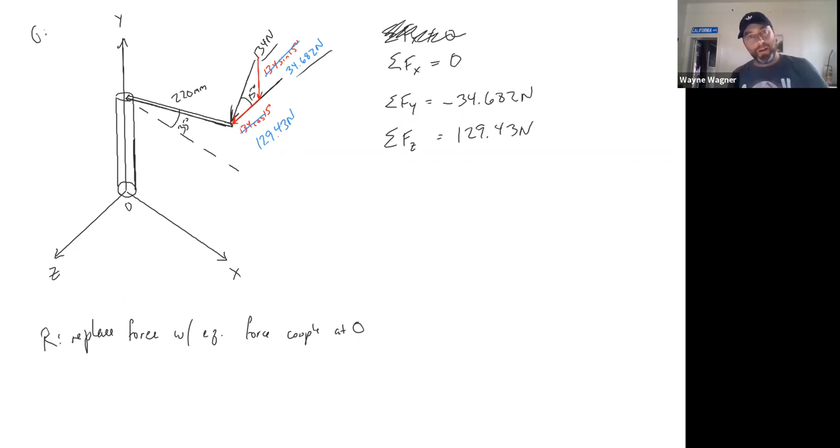Right, now we need to do moments. What sucks is, when we're in 3 dimensions, we have 6 equations: sum of forces in the X, Y, and Z, and sum of the moments in the X, Y, and Z. I don't want to do all of those, so I'm just going to do the single equation. Sum of the moments at O equals, and this is going to be all of the moments, I, J, K. What is the I, the J, and the K in this case? The I, J, and K are X, Y, and Z in that order. So I need the R cross F.

We only have a single force, so there's no reason to play around with multiple forces. I already know the IJK of the force: 0 in the X, in the Y it's negative 34.682, and the K. I'm going to put the units out here just so I don't forget. Sometimes I don't write the forces in these things just because of the space. Now I need to get the R. So wait, how tall is this thing? This is 150 millimeters. Yeah, you didn't write it down.

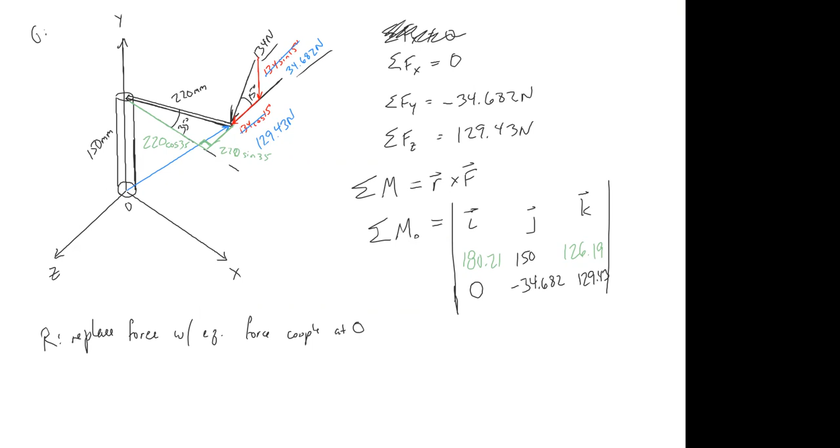Wait, so those values, that's the distance? Yep. Oh, the radius, okay. R is kind of like a displacement vector. So yes, it's just a distance. Okay, so I'm going to go ahead and copy these over. Negative 34 point. You can do Cramer's rule if you want. I find that to be unnecessarily complex, but you can do that if you want.

So ideally you're on graph paper, and so these lines make a little bit more sense. And what we'll notice here is we're going to get the I, the J, and the K. So the X direction, the Y direction, and the Z direction. So here's I. This one, 150 times 129.43. And I'm going to divide by 1,000 because I'm going to do this in Newton meters. So 19.415 newtons times meter. We'll do newtons times meters outside everything. Okay, so that's in the I.

We'll do J is 0. K is minus 34.682 times 0.18021 equals 6.25. 6.2500 in the K. Okay, now we'll do minus. We get nothing in the K from that one. This one, this is a minus sign. It'll be 0.12619 times 34.682. Oh, it didn't like this thing.

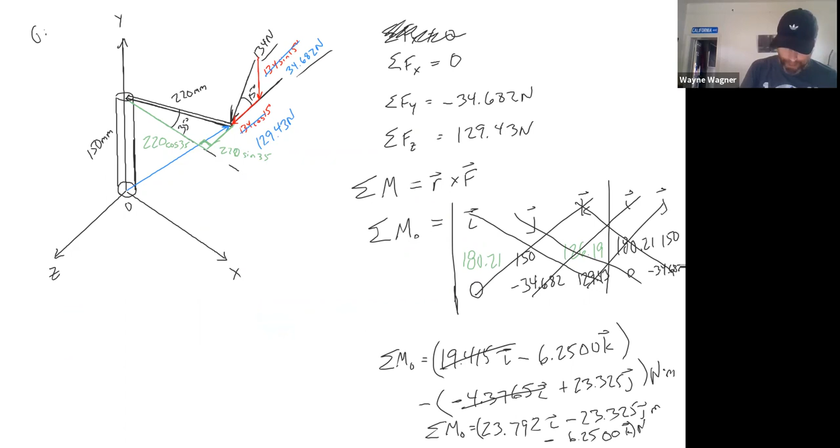So what we'll end up getting is, if you draw this in 3D, let's draw it on the original. I'm just going to erase the original forces. That force is gone. This force is gone. We don't care about any of this. Boom. So now I'll do the force in red. And so we've got Fy in the Y direction. I really should draw it as a single force. Yeah, let's draw it as a single force.

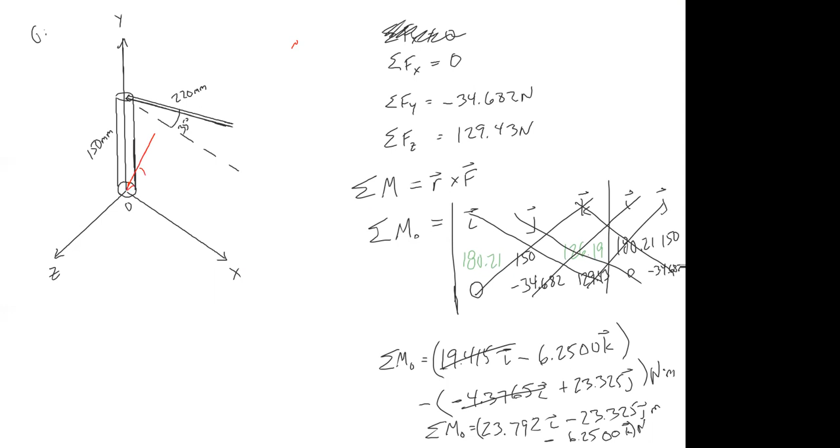So this is that 15 degrees, and I think we decided that this force was 134 newtons. 134 newtons. Okay, so that's the force.

Okay, and then the moments, and this is a little bit annoying. Here's the I direction. So here's my X vector. This is my X vector right here. I'm going to put my thumb in that direction. And that means that this is going over the top of that. Okay, so if you put your thumb in the X direction and you wrap your fingers around it, that's the positive direction. So this is 23.8 newtons times meters. Okay, now I'm going to do this, the J direction.

Okay, positive in the J direction. If I put my thumb up, positive is going, it looks like it's going around the back. So I guess really we would probably write it more like positive would be over the top, I guess. I guess it depends on how you think of it. Positive would be like this. So we're actually going to go the opposite direction because we have a negative sign. And so it'll be 23.3.

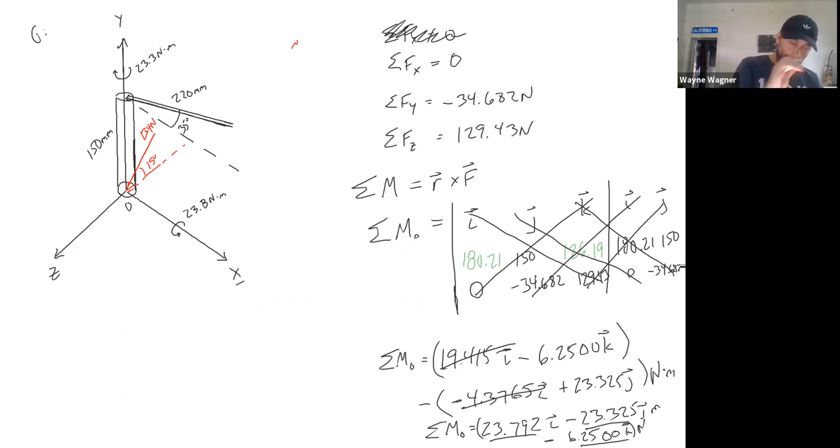Okay. And then for this K, in the Z direction, I'm going to put my thumb going in the direction of Z, and my fingers are going to be curling over the top of that thing. So this thing's actually going to go the opposite direction, which is this direction. And that's going to be 6.25 newtons times meters. And we'll talk more about how to do that. But this would be the answer right here. Although I think if you do this in Connect, it's just going to want this answer right here. Okay, I'd prefer you to know what that means though.

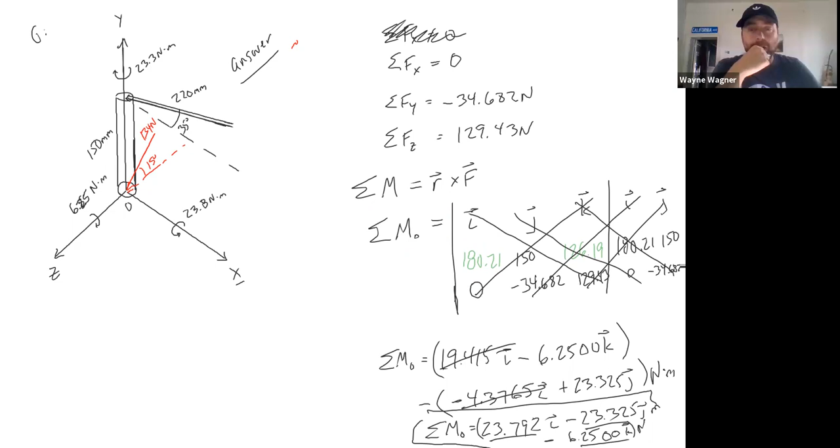So the moment vector is a vector? Or is it like, it's just like a rotation? Is there a rotation on the axis? It's a rotation vector. So like, let's suppose it's positive I. So what that means is, here's the X direction, here's positive I. So you're going to take your thumb of your right hand, and you're going to put it in the positive X direction. And whichever way your fingers are curling, that's the way that this thing is going.

Okay. For J, this is a negative J. So I can point my thumb in the negative J direction. And whichever way my fingers on my right hand are curling, that's the direction I'm going to get. Okay. I've got a negative K. So I'm going to put my thumb on my right hand in the negative direction. And whichever way my fingers are curling, that's the direction of the vector. It takes a little practice to get used to that, and we're going to keep practicing it. This is probably a good enough answer, but I would like you to understand what that means.

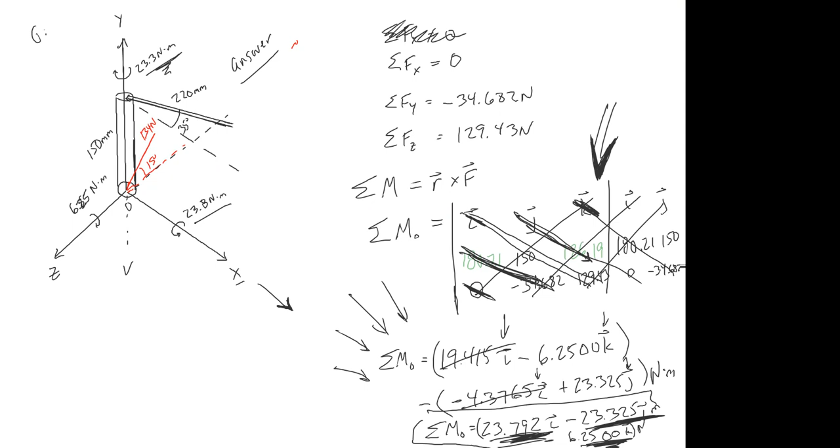If you want to do Cramer's rule, you can do that. But it's just the way you calculate a determinant. I can go over it again next class if you like. Yeah, okay. That was really weird to me, because when Jeff Hansen does his, he just does it the normal way. So he does Cramer's rule. If you want to use Cramer's rule, where you just cover up the I and then do the cross product of the smaller matrix, you can do it that way if you want. I find that to be more rife with problems, but whatever works for you.